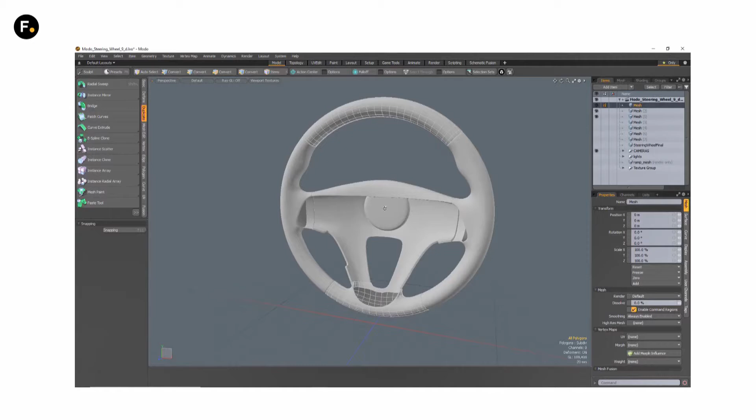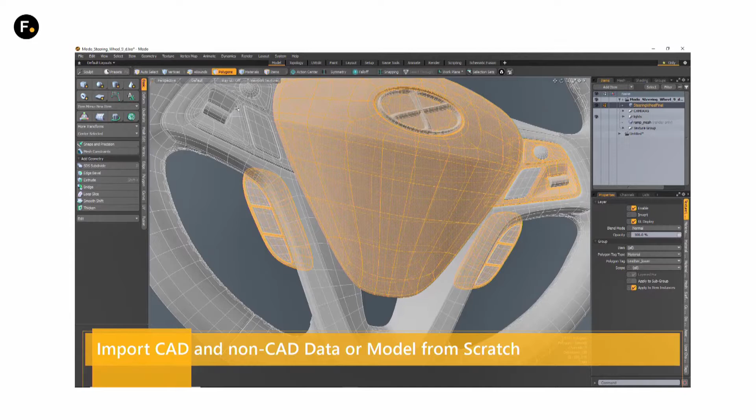And then I have my basic shape, and I start to add the several components I had previously modeled. These are separate components, which makes my life easier in the next stage, which is applying materials on it. So this one, I'll just call it leather, and these materials will carry over to colorway. The way I group them inside of Modo is the same way you can color change them or apply textures within colorway. Also Modo can import or load CAD and non-CAD data, most common formats in both.

So this is the Modo preview render. It's intuitive and dynamic, so you can drag and drop materials from your library and you'll see it in real time, just dragging some plastic and applying it.

I will show you next my light setup, which I have done to light up and make my steering wheel more photoreal. You can see the light below. For these colors, what's important is the amount of reflectivity you want in your material, because you'll be able to change the colors and textures later on colorway.

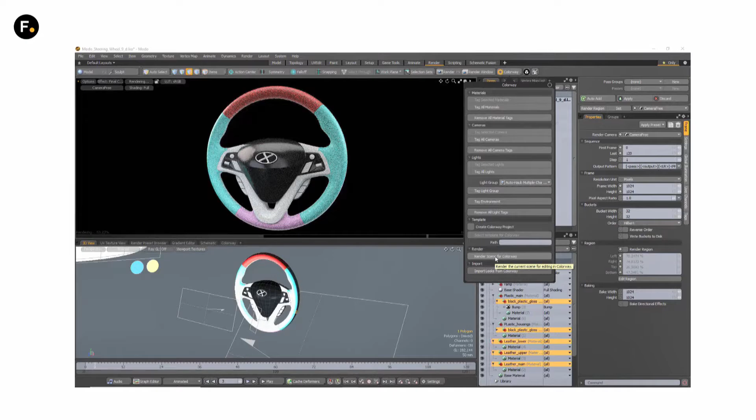So the next step is you choose the materials you want to change later on colorway, tag them, and then render for colorway. Save the file, which is what I'm doing now. And your Modo is telling you it's going to render a certain amount of materials and lights.

It comes in as full white, and then it's just as simple as drag and drop. You drag and drop, choose colors, drag it and drop it, which is what I'm doing now.

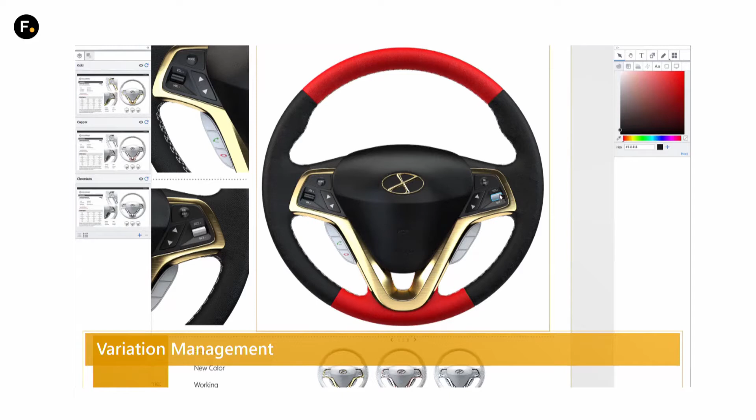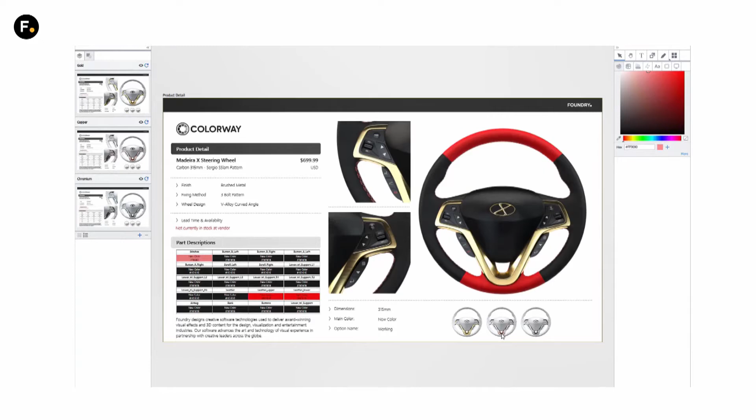I have all my buttons as a separate material. Maybe it wouldn't be necessary, but it's just to show you the potential that you can go in and change individual component colors. You can also shift click, which is what I'm doing now, shift click and click on the color, and it gets the black plastic color assigned to it. Also on the left, I'm doing the stitches now. You can see the real detail, and all the views show the new color for the stitches, because all this data is linked.

Even the table on the left, this dynamic table has a description of the colors you are using. You can use Pantone colors, you can import those, or you can use the current libraries, and also use textures. So everything is up-to-date, you would change, and you'll get a description of the color you are using.

The texture you are using, which is what I'm doing now, just applying some textures. You can also dynamically change the texture size and wrapping - it will wrap around your object, which is what I'm adjusting, some sizes on these textures, and just applying the texture somewhere else, adjusting the size a little.

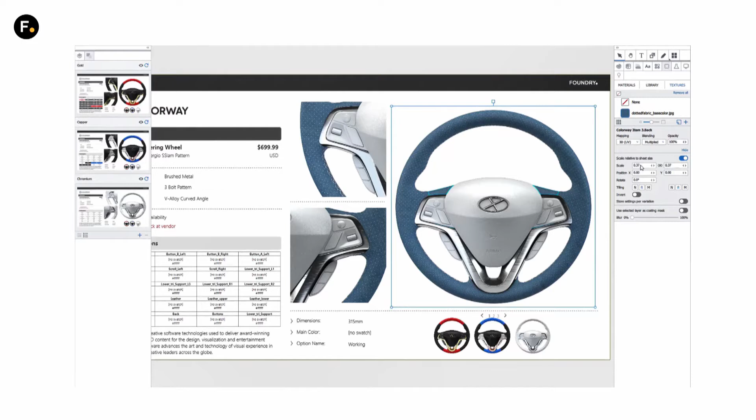You can position, rotate it around, and it will wrap automatically around your 3D object. Same process going through, applying the central part.

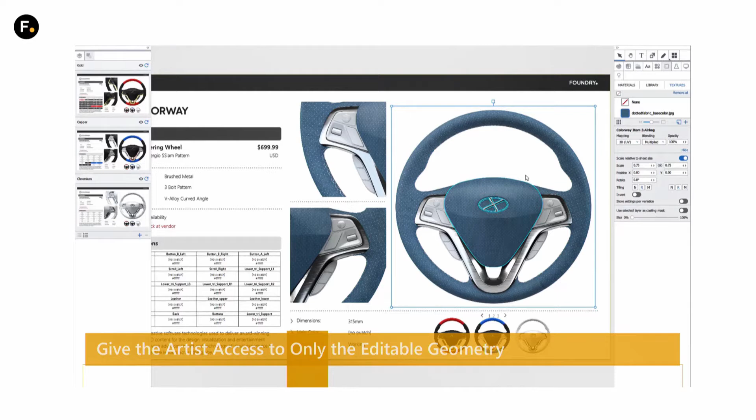Once I'm happy with my textures, I can start to apply some colors, and you have the final layout, and you can store it. As soon as you store something, it automatically pops up on the table below, and you always have, like here now, it shows up below on the table.

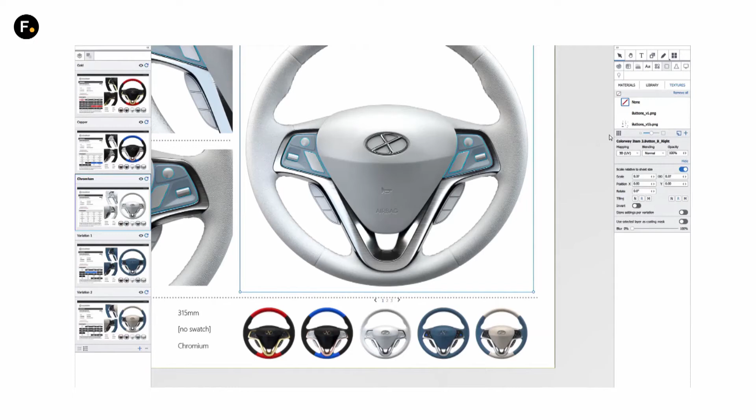You can swap out colors and materials automatically, always have an up-to-date description of what textures, what materials, what Pantone colors you used.

So here, a new texture has a totally different look. Just apply it on some components, the lower part and the upper part.

Here is some plastic, just dragging black plastic onto it. And again, selecting the individual buttons and applying color and then the texture I want.

You can also have several different artwork options for the buttons. You can swap them, see how it looks, see if you like it, if you don't like it.

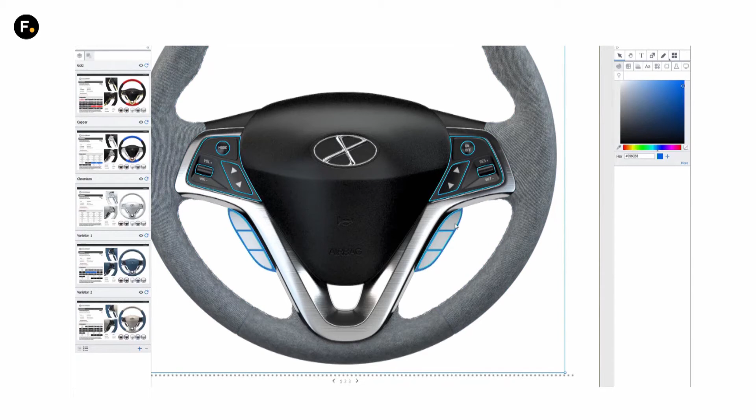You can have several views. So this is the front view. I have two other side views for the buttons, but you can have as many views as you want - you just need to tag the cameras and you'll get all those views in.

So just choosing the image you want to apply on those buttons. This image is white, that's why you are not seeing it, but it's there. I'm going to drag some bluish color to the buttons and then it will show up.

Yeah, which is what I'm doing now, some blue color, drag it, and then it will show up. Also, like many 2D packages, you have the possibility to apply images as normal or as multiply, and then it will overlay the black areas on top.

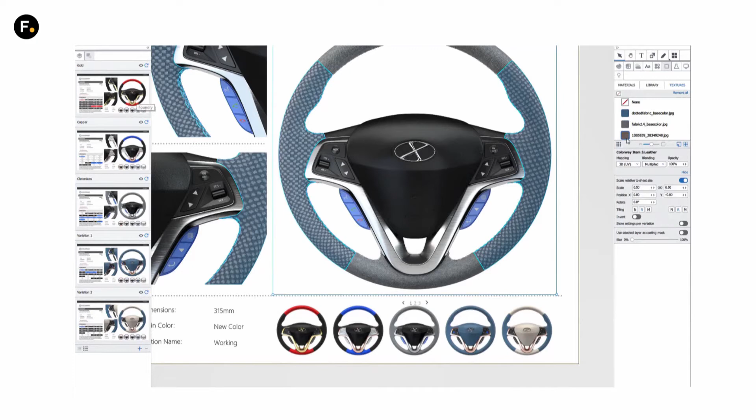On the left, you have the up-to-date list of all the materials you used, all the textures you used, all the variants you stored, and this is the final one, just loading a different texture. It's too big, I will rescale it - it's smaller now.

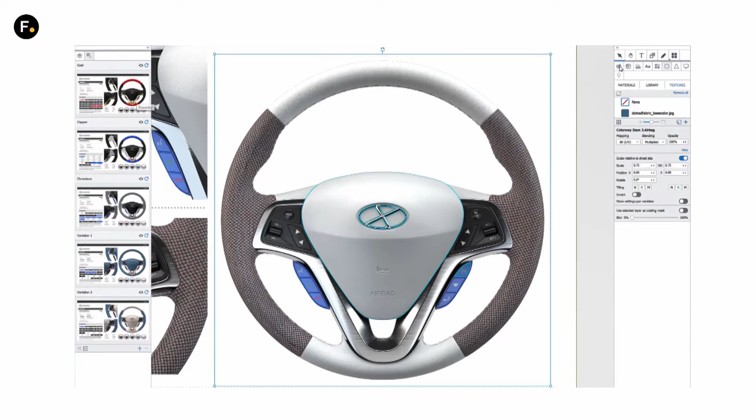Applying the same process. You can also remove things, which is what I'm doing now, removing the previous texture because I don't want any texture there. Want a new color here, just color it, have it white, or just drag and drop a new color, which is what I'm going to pick now. Just pick a new color and drag and drop.

We'll probably not go forward with this one, but it's just to show you what you can do. So just update, and you see the final, my last variant of the wheel.

This dynamic data is also connected to an Excel sheet, so you can have pricing, and besides the technical information that you get from the 3D model and the textures you use, you have that there too.

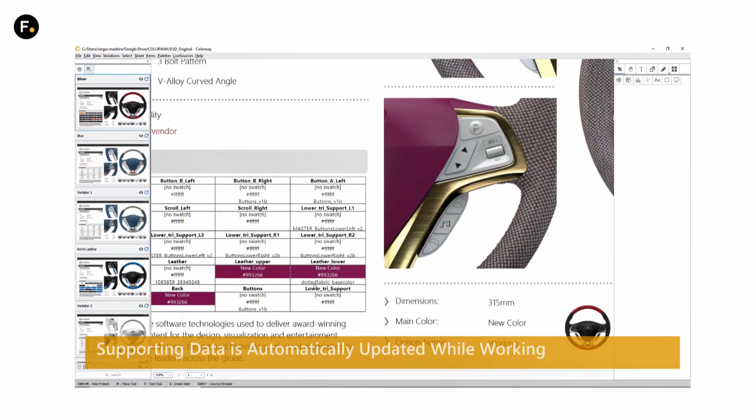Yes, with all the Pantone or colors used, pricing - you can have all this data like from the list, deriving from an Excel sheet, which is what I'm just going in to change, the pricing and change some dimensions.

And this is linked, so as soon as you change it, it will show up in your colorway. So you can have different versions with different pricings and different technical sizes - just go in and change it.

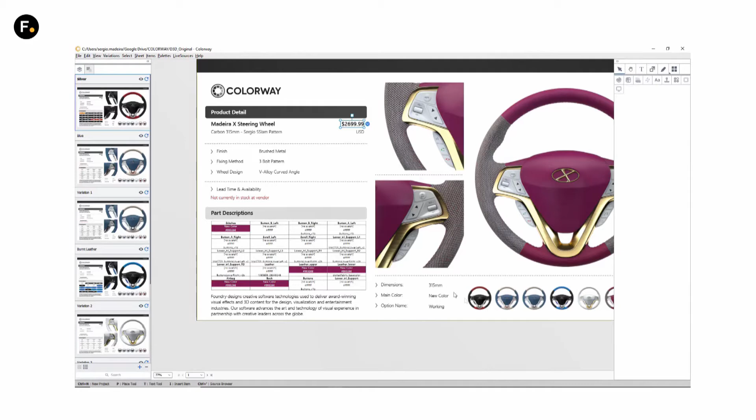Again, all this is dynamically linked, so you save a lot of time. Color and material departments don't have to go to the 3D guys and ask, can you apply this texture, can you do a new render, rotate the texture, try this color. They can have the model themselves and experiment and make decisions quicker. So that was the steering wheel workflow.

Now we have a new one, which is footwear, but the same principle applies. I'm going through the early modeling stage. In this workflow, I did the scanning, so we had the physical scan to start with. Within Modo you can use the topology tab, so everything you model will snap to the background data. It's a lot faster, and it will automatically adapt to the geometry, so it's just faster to model.

You don't have to spend a lot of time worrying if you're matching the right shape, because you are - it just snaps. Although you could start from scratch, this is just a workflow.

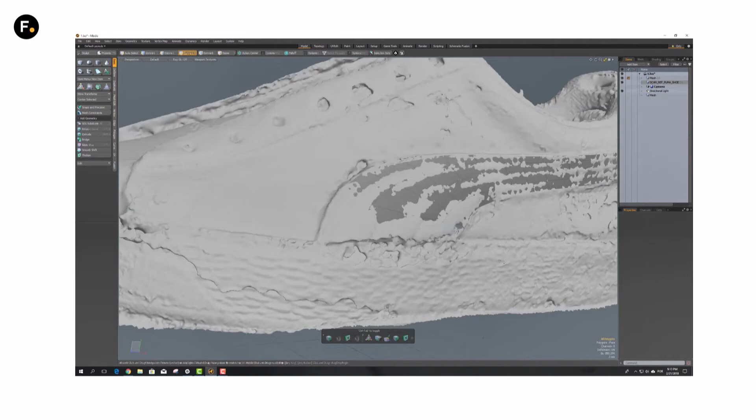Here I'm thickening, just preparing the part to thicken, and thickening right now - this is the sole. Also this sole, just to show you an example, was imported from CAD data. So Modo, as I said previously, loads IGES and STEP files, and you can still go through and modify it, which I'll do in a few steps.

So this is applying some deformers, which will really enhance the realism of the shoe. Every component that you want to get the same deformation, you just drag and link it, which is what I'm doing now. Now I'll pull the deformation back, and you see the inner sole is not deformed. So I can just pick it and connect it, and it's automatically deformed - everything gets the same deformation, everything will match right.

Just going through some sculpting, because sometimes you need to go in and paint the shape a little. This is again the preview render within Modo, with my light setup - very quickly you can see how your model looks, if you like the materials, if you like the light setup. You can experiment with different materials and render. I have several different views, and this is the final image from Modo.

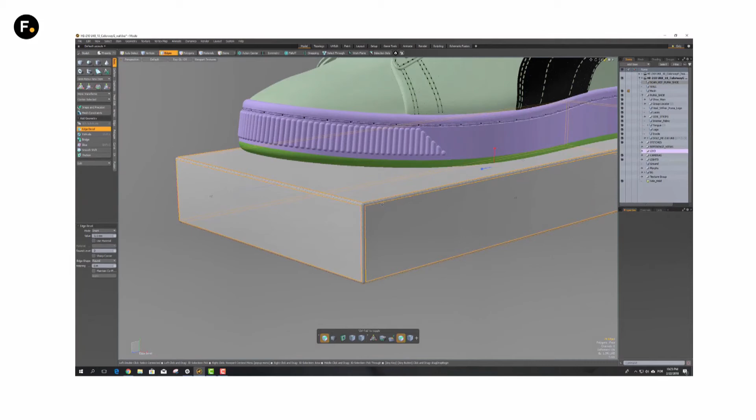But you can take it further. So here I'm going to do something a bit different - try to place it on a bookshelf or shelf, add some radius, have the back wall, apply some texture, take it to the render again, and have something different, with a different environment. All my lights are there, and here's the final shot - all this with the preview.

So if you render this, then you take it to Colorway. I have some colors already created, but for one view. Another feature about Colorway is that as soon as you load the rest of the views and link them, it will automatically assign all the correct materials to the corresponding views, which is what I did just now. I linked all the views, and since they had the same material names, you can dynamically adjust the textures, which is what I'm doing now - go into the several components, change the color of the laces, change the color of the sole.

This technical description is on every sample. Here, all this is variants. On the second sheet is all the variants I have, and you can connect it to a specific view, and it will update everything.

Really simple, and you don't have to imagine the time you save. If the color and material department has this, they can just experiment on their own, have different scanned textures, apply them, and take decisions quicker without having to go to the 3D guys to re-render and experiment with different looks. The 3D guys can stay focused on designing, while others can focus on applying textures and making decisions quicker.